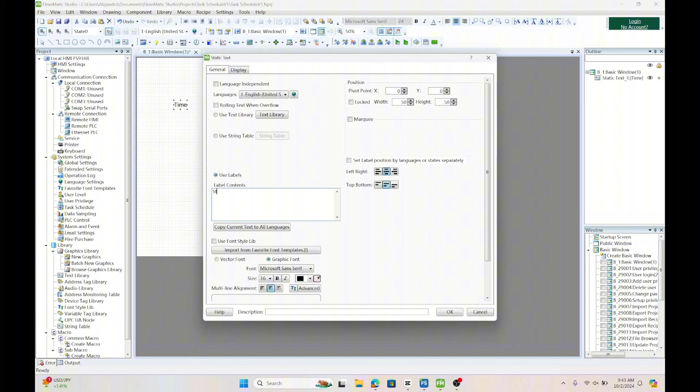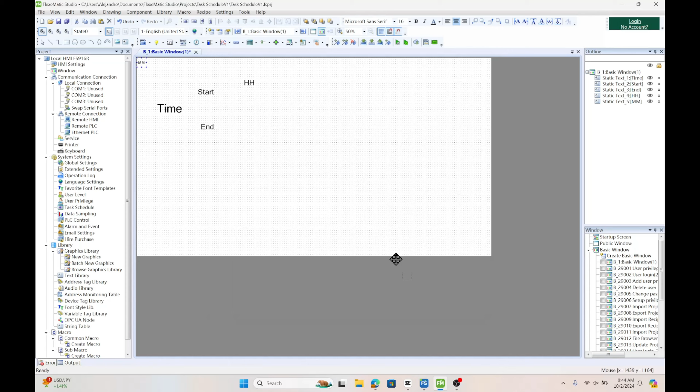To establish conditions like start time and end time, let's set up and display these in our project. By adding static text, we can differentiate between the start time, in hours, minutes, and seconds, and the end time. We will also place numeric value inputs for both the start time and end time.

When placing the numeric value inputs, we are going to select the address type RW and address 1. Then, we multi-copy and review to see if every address is in order. You can also design the graphics of the components as your likings.

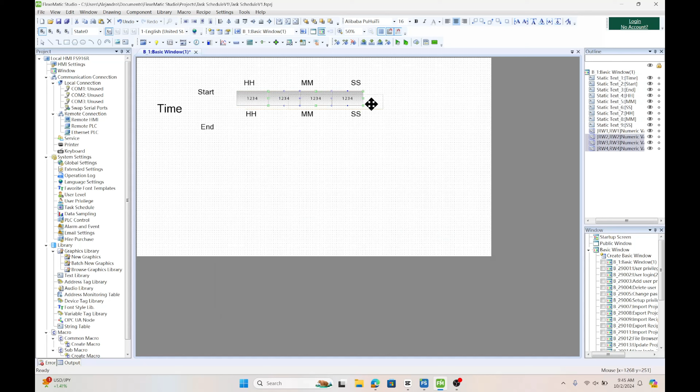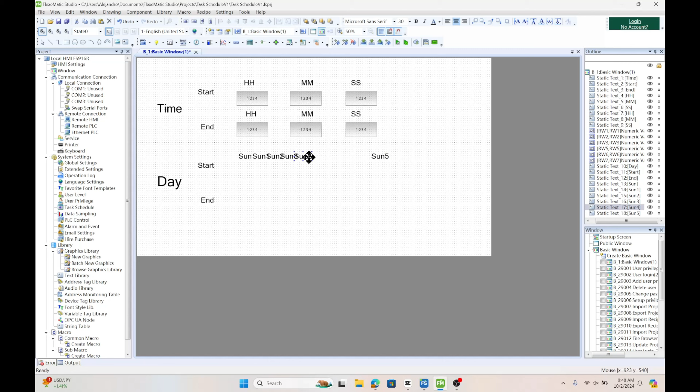Additionally, the task schedule can be set for any days of the week. Therefore, let's add start and end days and incorporate switch button components to select the day. This will light up in representation of the day it currently is.

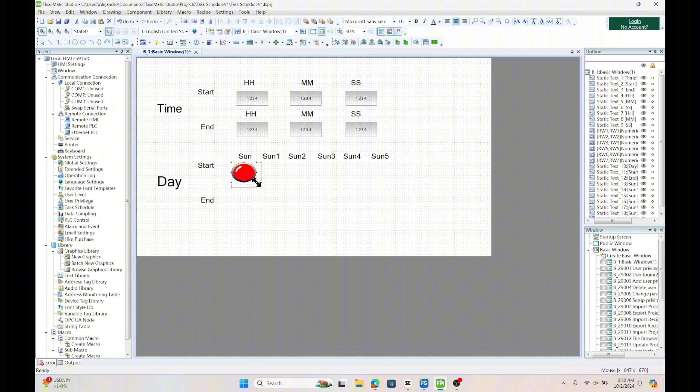Assign the RW address 4 with decimal 0 and continue from Sunday 0 to Saturday 6. Each day should have a register of 4 with a corresponding decimal. This address type is only used on the start day.

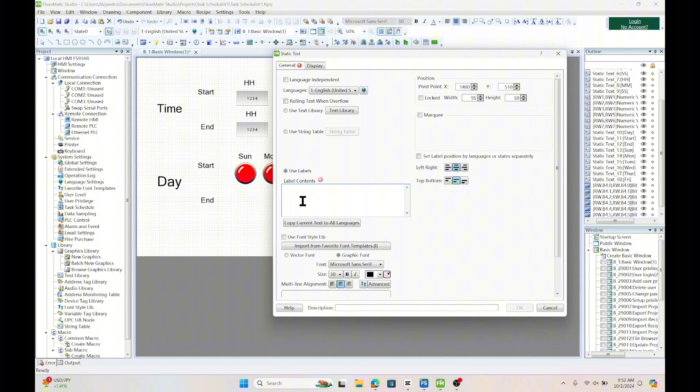In the end day, the address will be 8, incrementing from decimal 0 to 6 to represent Sunday through Saturday. Afterwards, you can add a calendar and clock function, setting the parameters according to your specifications.

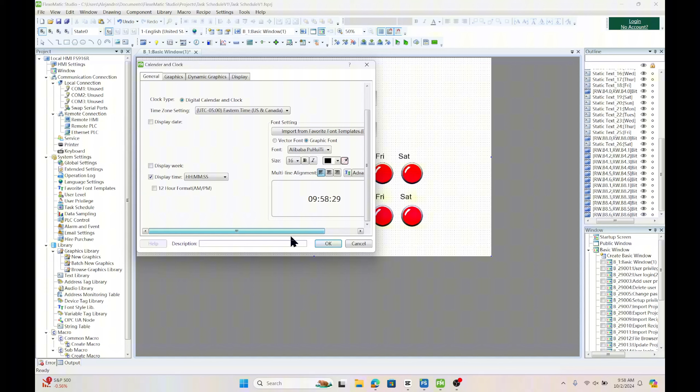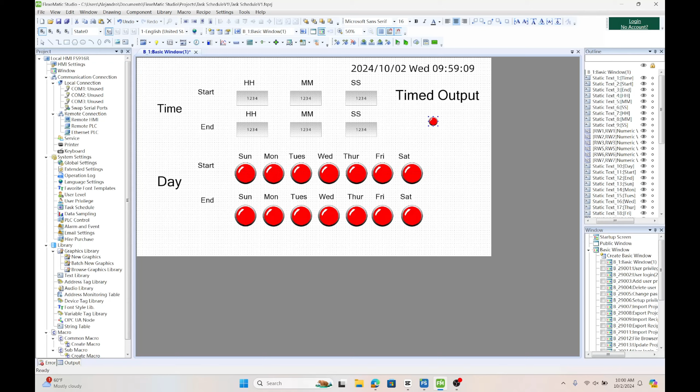Once set up, you can add an indicator light to enable the timed output during the scheduled time. Apply the correct registers. In this case, we set up the switch bit and place address LB0. Now the components should ensure the functioning task schedule operation.

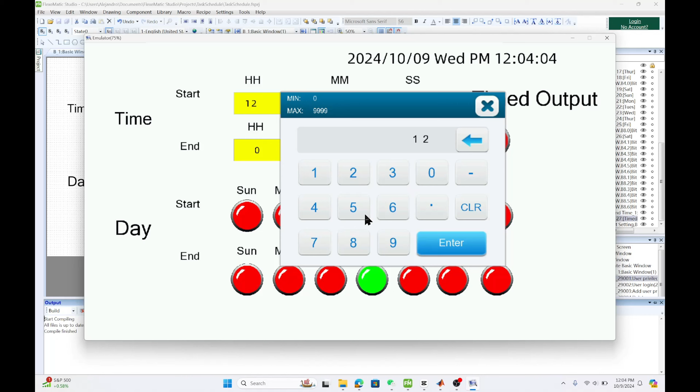With the project now being simulated, we can choose the start and end dates, as well as the specific times for the indicator light to turn on. Once these settings are configured, the system will handle the rest.